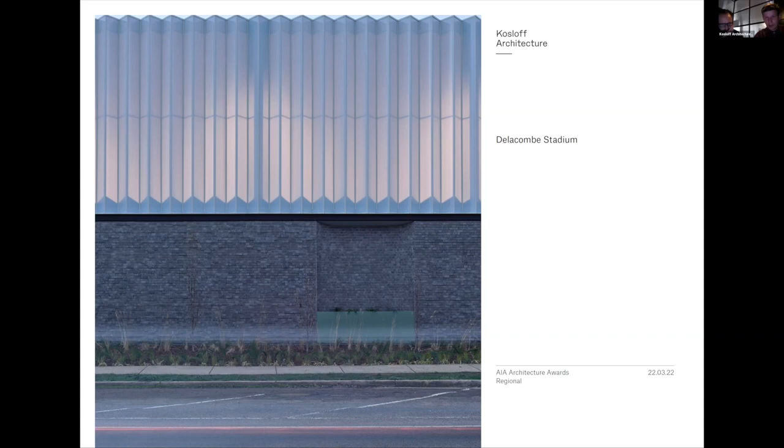The client is the Victorian School Building Authority, and the project is delivered under a lump sum modified AS 2124 contract, with Kosloff as the superintendent engaging full subconsultants. Delacombe Primary School staff, students and community members, Ballarat Council and Ballarat Basketball are our key stakeholder groups.

For us, the process of consultation is really about having a meaningful conversation through face-to-face workshops, student drawing activities, online surveys, one-to-one interviews and listening posts. We listened and talked about what success could look like for the community.

Of course, they wanted the prosaic elements, the gym, a place for basketball, volleyball, sport and assemblies. But more broadly, what they really wanted is a project that invites the town into the school, removes boundaries and encourages a sense of wider ownership.

They need a facility that provides a means of income to fund educational support programs and outreach services. At the moment, the building is rented out most evenings and weekends with a yearly return of about $35,000, which has a huge impact on the school's functionality.

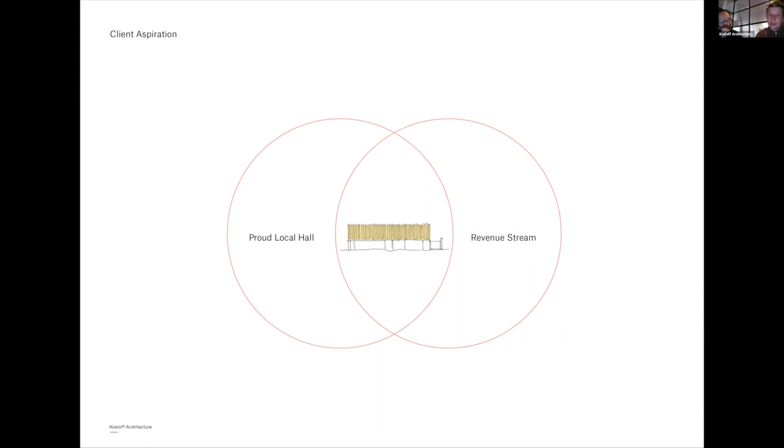So with the school's support, we were interested in exploring the idea of the civic, as well as challenging the typical gym typology.

Delacombe is on the fringe of Ballarat, a population of around 6,000 people. It was named in 1965 after a post-World War II program that included the development of around 150 social housing blocks, all constructed on farming land.

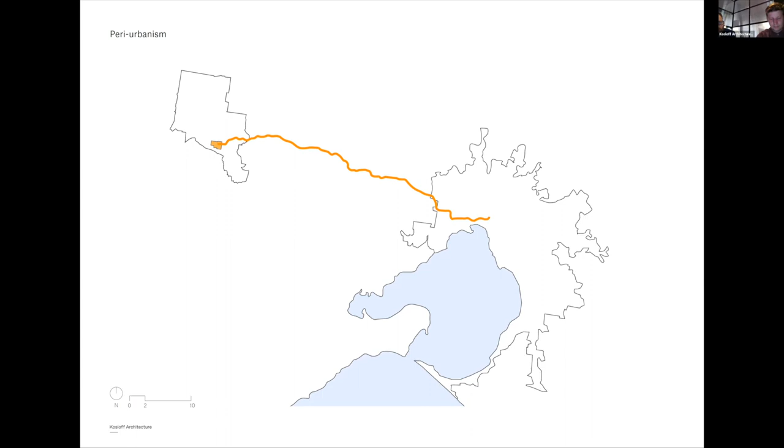So in many ways, it's typical of outer urban development or peri-urbanism, an area located immediately adjacent to a larger city area. The town itself is a byproduct of agricultural land converted to industrial, commercial and residential uses.

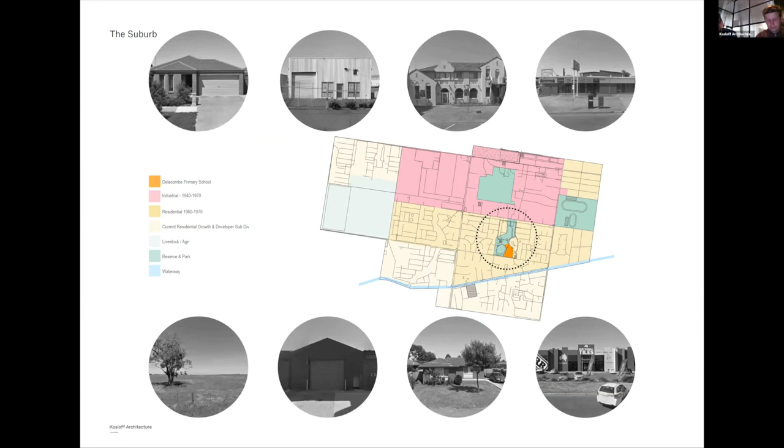Predominantly, it's a disparate mix of low density residential housing and light industrial sheds, all of which dominate the built environment.

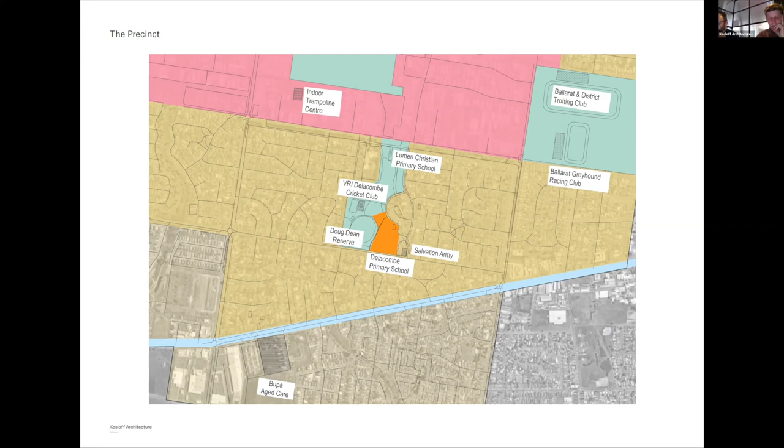Delacombe itself has really limited public amenity, and it's dispersed, with no real heart or town centre. We were interested in exploring the immediate relationship to our site, shown in orange in the centre there, where a formative cluster of public functions could be reinforced by the siting and design of our new stadium.

The building, shown centre bottom of the screen, started to address and leverage off the adjacencies. The Doug Dean Reserve to the west serves as a user for the changing rooms, meeting rooms and facilities on the northern side of the building. It's a local club hub.

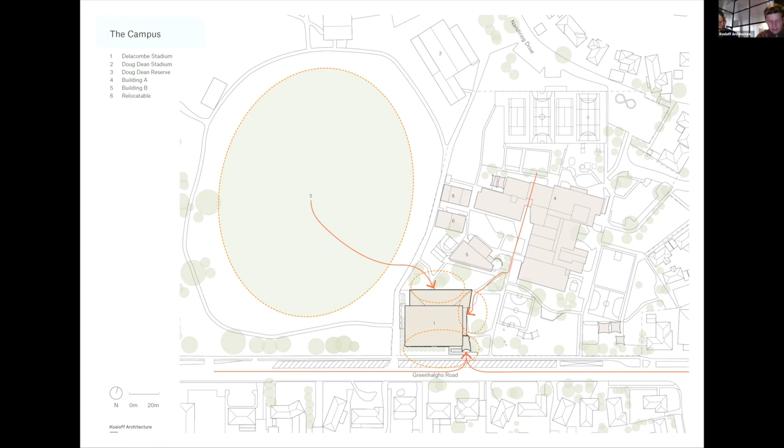The building creates a pocket park to the north and kick-around space between the existing 2010 era BER building, creates a new junior years outdoor play space to the west, and a prominent entry immediately off Greenhalghs Road to the south, a new front door for the school.

The plan arrangement shows the entry sequence from the road with a compressed low height foyer, drawing visitors through to an undercover eastern veranda and northern amenities wing, all laminated around the larger gymnasium element.

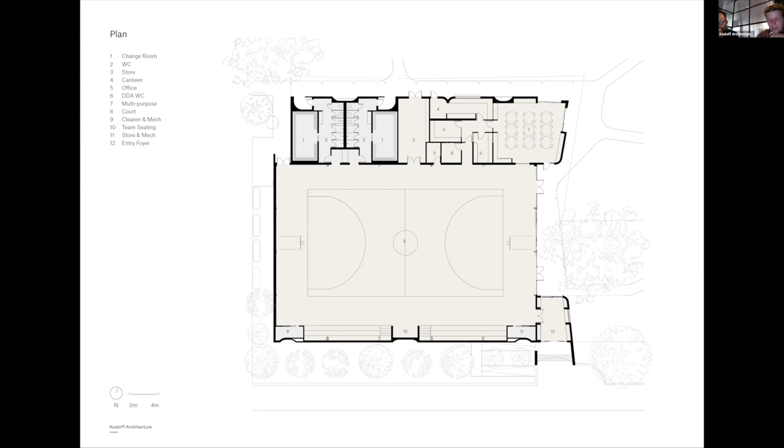The offset here, or slippage of form and porosity of view through spaces to beyond, allows the large floor plate to offer a sense of generosity while also providing for the intimate.

Returning for a moment to the dominant typologies of the town, which is industrial and residential, we were interested in drawing out the scale and texture of the industrial shed and also the ubiquitous nature of the brick veneer house, using them as formal design drivers.

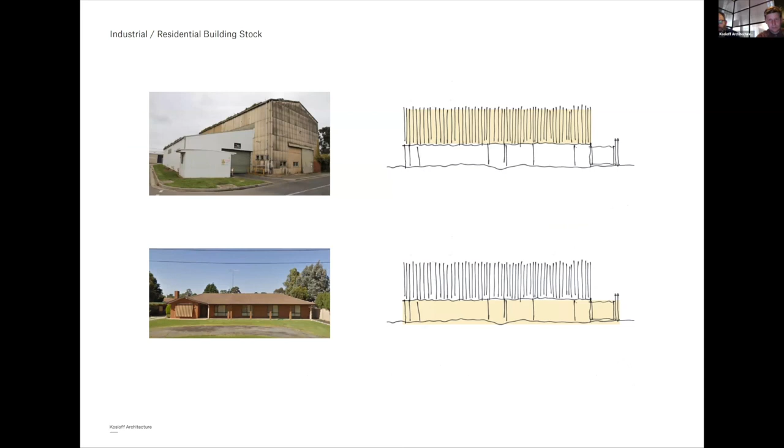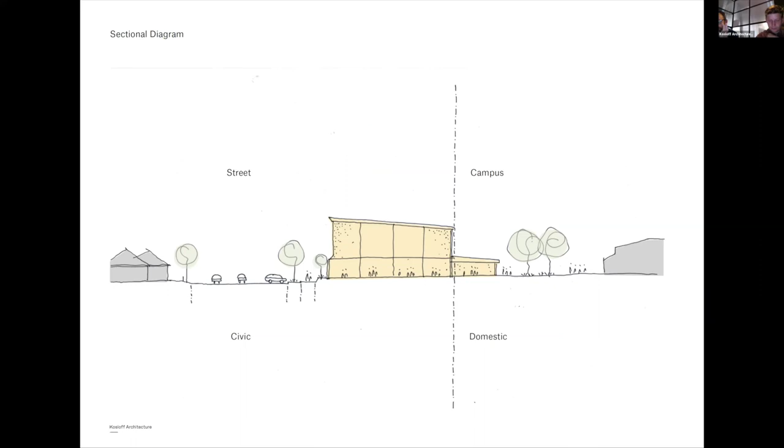We felt that the scale relationship between industrial and residential typologies surrounding our site also provided many cues as to a street or civic interface scale, as well as a more domestically scaled campus site.

Here, the entry is clearly articulated and provides a sense of immediacy from the street, with fencing removed and built form deliberately sited with offsets of 2 metres to the entry and 5 metres to the large volume. Quite an immediate street interface.

East and west short elevations shift in scale to the domestic, the campus, the student and the play space. They provide for strong visible connection and interaction between inside and outside activities.

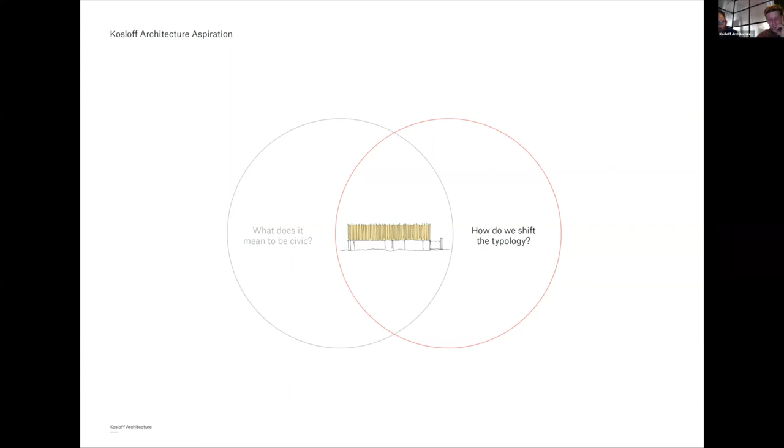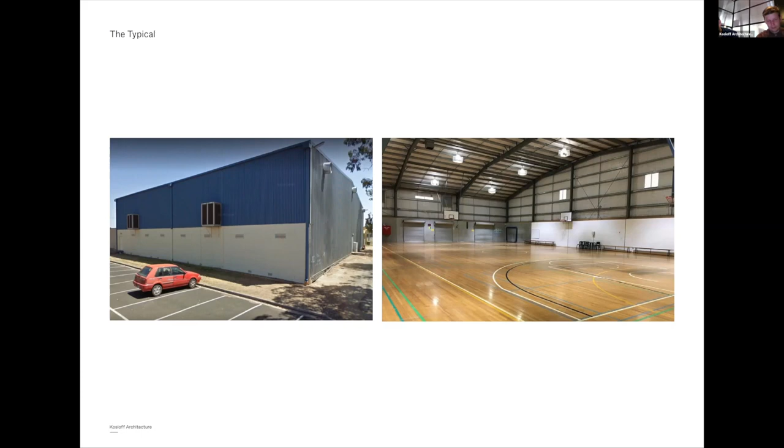So how might we push the gym typology? As any parent with basketball obsessed kids will testify, these venues are typically acoustically uncomfortable. They're glaringly lit and it's almost impossible to find the front door. Formally, they're typically large boxes that don't engage with the street or the campus they're on, and there's a flatness to the interior devoid of anything poetic.

There's a good reason for this: they're typically executed under a very tight budget, and the budget for our project was really no different at around $3,000 a square metre. So it becomes a question more about editing and judgment when trying to design within these constraints.

I guess we went to Bunnings, perhaps metaphorically but not literally, searching for inexpensive proprietary systems that might be deployed in an atypical manner to build a language and a delight beyond their usual standard.

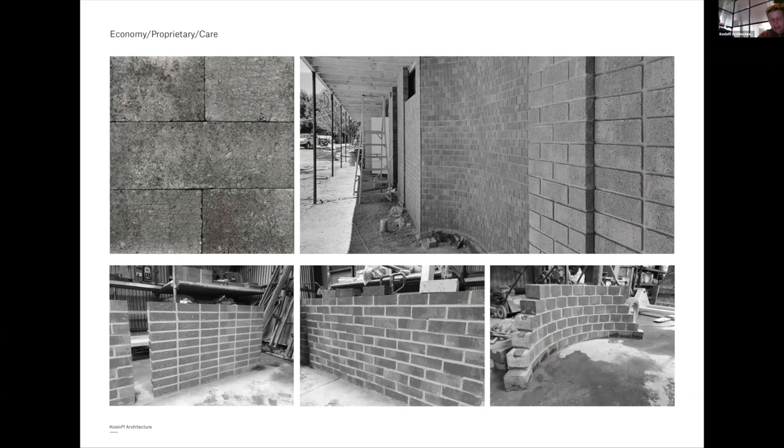86-cent concrete blocks that have a natural blended or modelled texture are used with multiple coursings, wall depths and articulations to carve and shift wall alignments to create a provisional lower skin.

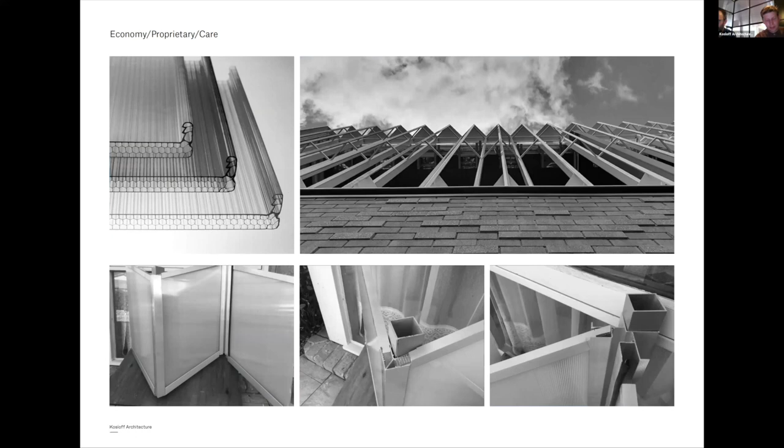Metal cladding profiles that exaggerate the quintessential corrugated sheet bring an urban scale texture to the upper form. Off-the-shelf polycarbonate materials are compressed to mirror the profile of the sheet metal while performing a dissolving trick as internal lights shift the southern elevation from static to glowing beacon.

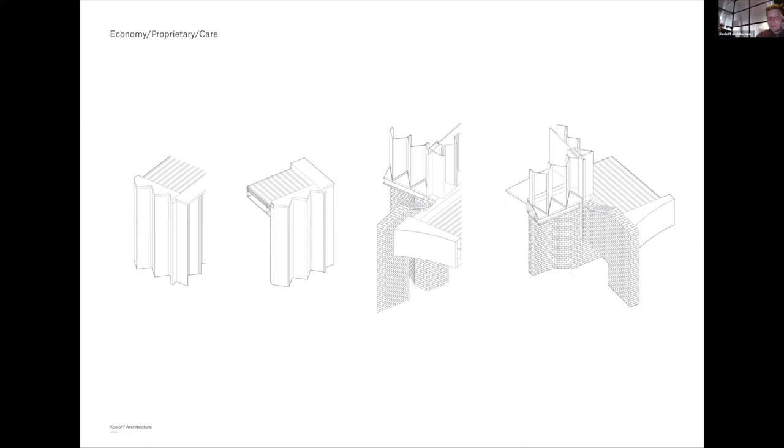And here, the turnaround corner and change from solid to transparent as material shifts.

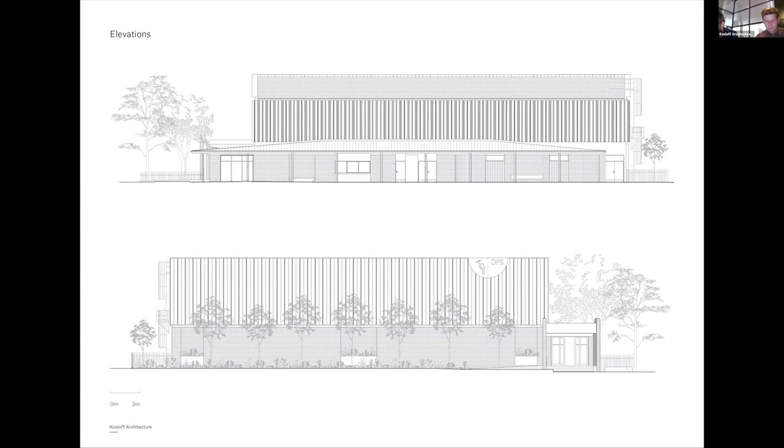A series of elevations: there's the campus-facing elevations where we can employ the sort of compressed scale. Then at the bottom, the civic elevation, with its discrete entry on the right there to the street.

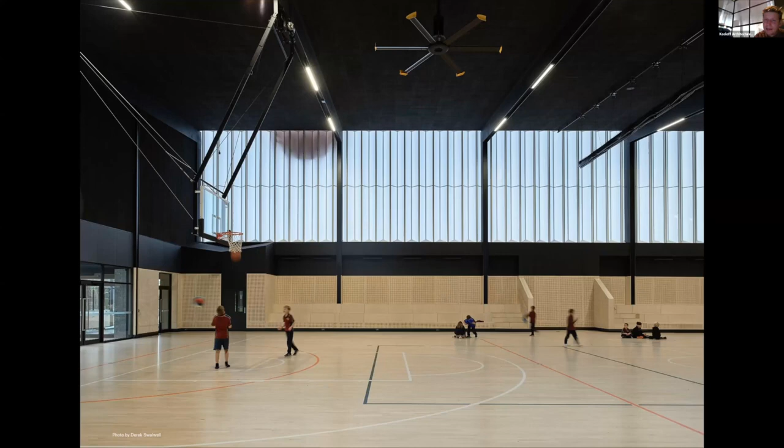Our interior spaces utilise a concertina arrangement of Danpalon that diffuses the light but also assists with improving the acoustic performance. I'm thinking about the theatre, the performance, the internal space, the focus of attention, and the clear span. Thank you.